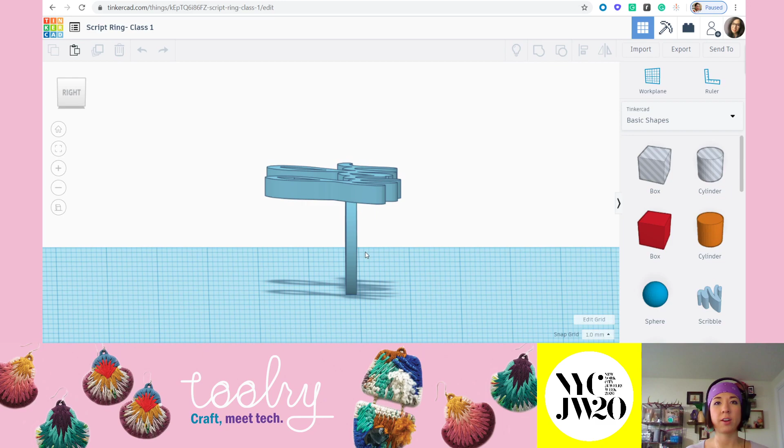Jumping right in, to give you an overview, this is the ring itself. For this class, you're going to need to know your ring size. Both finger holes will be the same ring size unless you choose to go otherwise, which is fine. You will also need to decide what this width is in this direction and this width in this direction. In this case, it's 2 millimeters for me, and it's the same in both directions, so it's a square cross section.

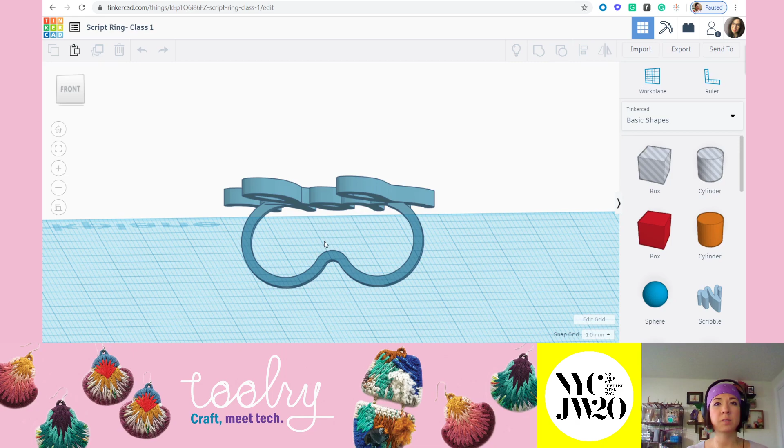The way this class is going to go is we are going to first model these two ring shanks, then model the connection point, then trim away all the excess metal of the shanks, and then the last thing will be the word or the script itself. Jumping right in, you'll want to create a new Tinkercad window, create new design.

The first step is to get the ring shanks together. To do that, we're going to take a cylinder from the Basic Shapes menu and drop it roughly in the center of the work plane. We're going to reposition this cylinder by rotating it 90 degrees and then resizing it to our ring size.

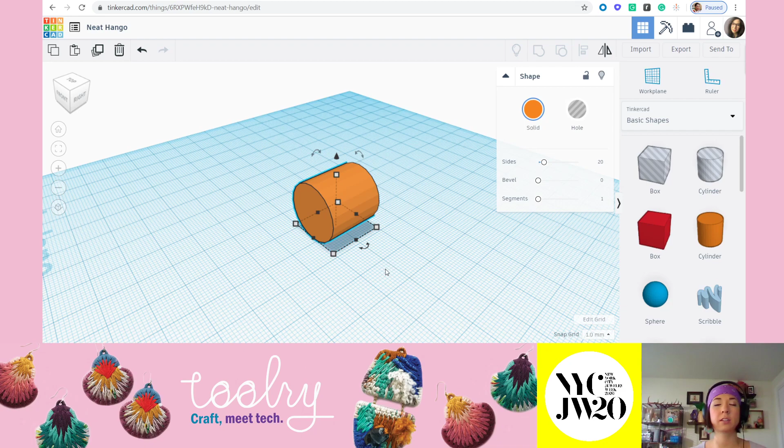In my case, I'm a ring size 6, which is 16.5 millimeters. If you need to find your ring size, you can look at the full class description in the comments of the video itself. I have all sizes from 5 to 13 listed, so feel free to pull that there or follow along if you're a size 6.

So we're going to resize this to be the inner diameter or the ring size. I'm changing 20 to 16.5, which again is a size 6, and 16.5. So you now have a perfect cylinder in your ring size.

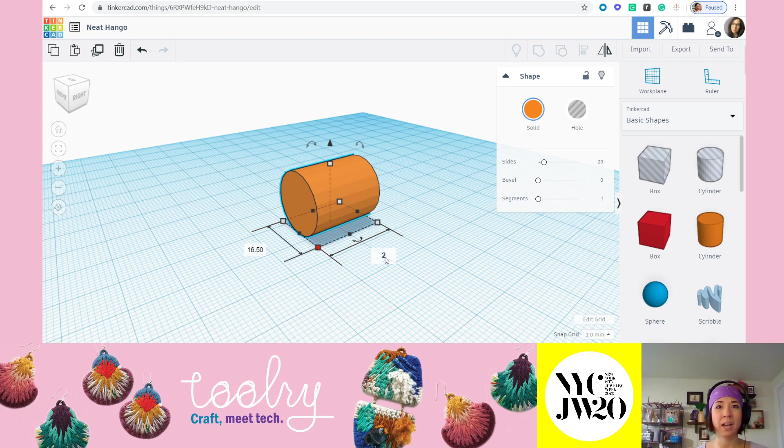We are also going to change the side measurement to, in my case, 2 millimeters because I want to have a 2 millimeter thick band. We also want to increase the number of sides to remove these faceted faces. Clicking on the cylinder, increase the number of sides to 64, and now we have a nice smooth cylinder.

At this point, we're going to duplicate and hide. So duplicate, hide. Now I have one cylinder left, and I can see that I'm hidden up here.

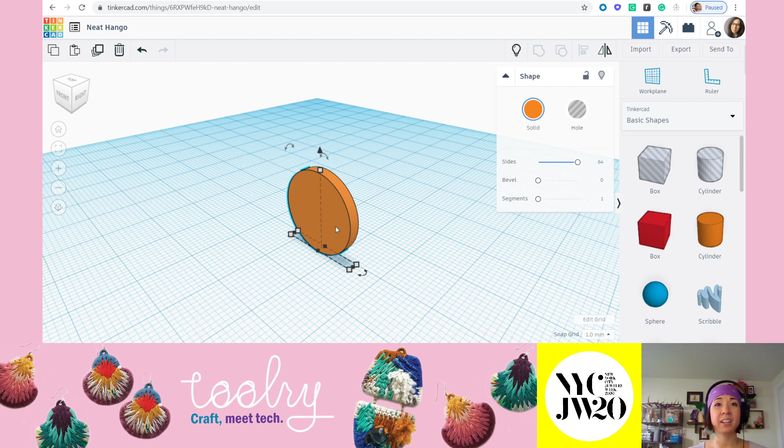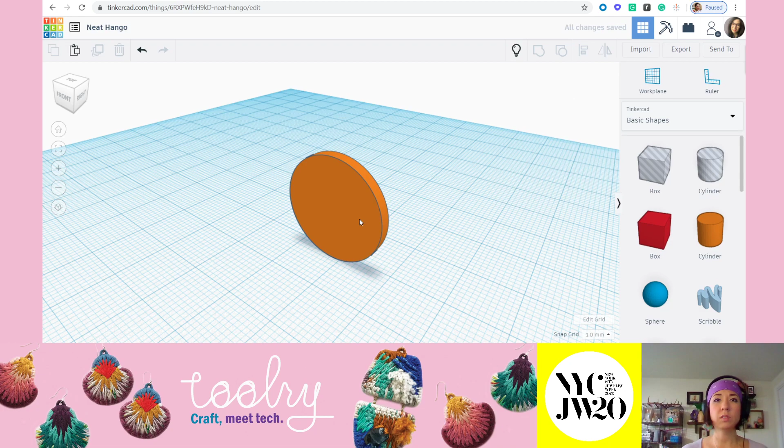I'm now going to resize the cylinder, basically creating the wall thickness of my ring shank. I had done 2 millimeters in this direction, and I also want to have a 2 millimeter thickness all around. That means I'm adding 2 millimeters to either side of my diameter, or 4 total millimeters. So 16.5 becomes 20.5 -- I've added 4 millimeters in my case. You might be different if you have a different thickness. So now just to double check that: 20.5, 20.5, and 2.

You're going to want to just remember those measurements that you had set. For me, I said 2 millimeters this direction, 2 millimeters this direction. We will need this in a little bit, so make a note of that somewhere. Go ahead and show or unhide your previous cylinder. Mine's overlapped, so I'm just going to drag it out of the way. And you're going to turn your smaller cylinder, your original one, into a hole.

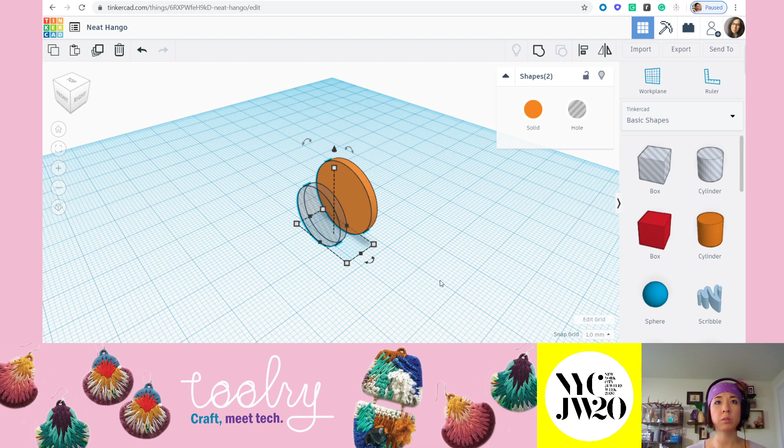We are now going to use the drag a bounding box to select both objects, and we're going to use the align tool to align the center points. For aligning, you want to select the center point nodes of all different orientations. When I do that, I can see that I've got perfectly lined up center points and my hole extends all the way through to the backside of the solid.

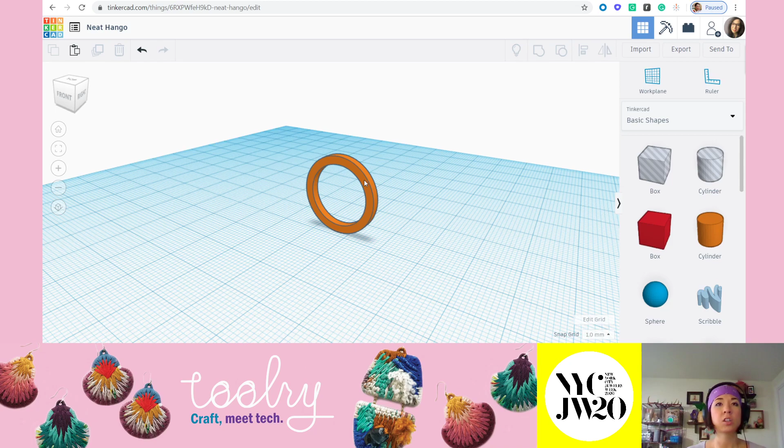At this point, I'm just going to highlight these to select them together, group them to cut away, and now I have my basic ring shank. At this point, you want to go ahead and toggle to the front view, so that we can get a nice perspective of these. Then go ahead and just toggle this to flat view rather than perspective view.

Now you're going to duplicate this shank, and you're going to use the arrows to slide your new copy over so that you're positioning the two ring shanks side by side.

So for the position itself, you want to get these in place. Depending on how close they are, your little connection arch will be lower, or if you have them further apart, you'll end up putting that arch a little bit higher, or at least those ring holes get spaced a little wider. If you've got big gaps between your fingers, you might go a little wider. If your fingers seem very tightly spaced together, you might go a little bit closer. I'll go a little closer, but you want a little bit of a gap right there in the center.

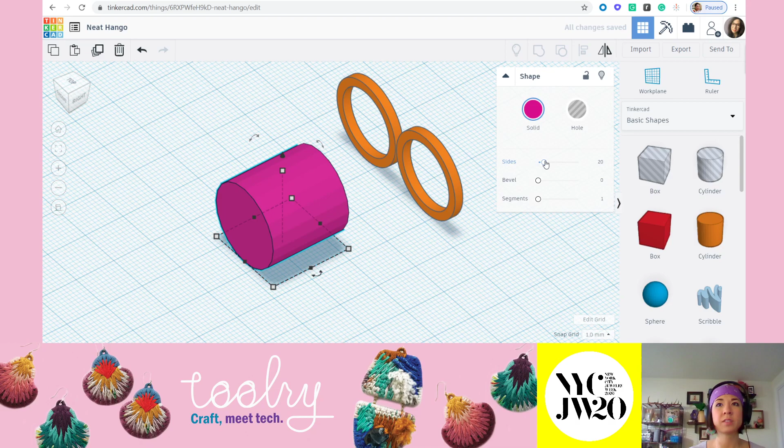At this point, we're going to lock these two objects temporarily, and now we're going to work on that little arch, that connection point. To do that, we want to grab a new cylinder, drop it roughly in front of our previous cylinders, and change the color. I'll refer to this as the pink cylinder, so you could change it to pink too. Just a little bit in the front, and then again we're going to rotate this cylinder 90 degrees, and increase the number of sides to make this a perfectly smooth cylinder.

At this point, I mentioned you're going to want to remember that measurement here and here, so just keep that in mind for the time being. We're going to go back to that front view and change your snap grid increments from the default of 1 millimeter to 0.25 millimeters, so you can get a little bit more precision on this next part.

You're going to select the pink cylinder and resize that. I'm holding shift so that when you scale it down, it remains cylindrical and doesn't turn into an oval. You want to scale this down, and I can't really tell you what size this should be — it depends on the ring size itself and also the spacing.

But here's what you're going for: using the arrows, get this in a good position where ideally you want the outer edge of the pink cylinder to match up with the inner edge of the orange ring shanks. You want as little gap as possible and as little overlap as possible. Let me show you what we're going for — that right there is the perfect overlap. You can see this is not in line, that's fine. Really what we're concerned about right now is continuing this curve into this curve and then back down.

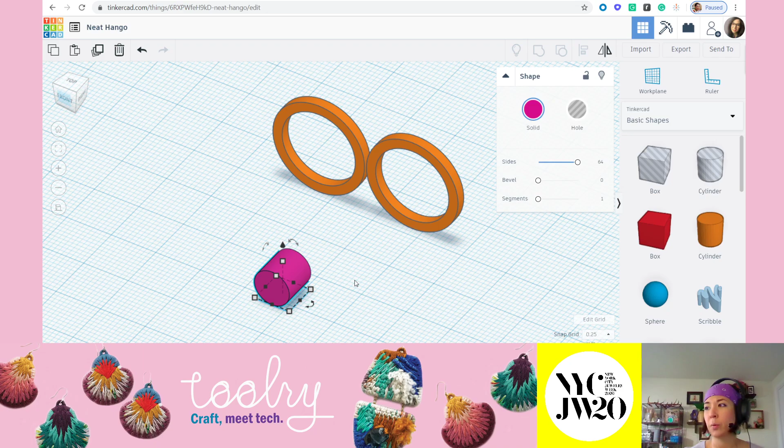So once you have that, we're going to continue to move on. Now you can see that my little pink cylinder is not really in a line, but we have it in the right position. So we're now going to unlock, select those, unlock, and just hide these for the moment. We have a little more work to do on this cylinder, so go ahead and duplicate and hide one of them.

Now we're going to make the inner hole for this cylinder so we can cut it away. First, change that to be a hole — this is your duplicate cylinder, you've got one hidden. So this is now a hole feature, and I said to remember the wall thickness or the width of your ring band, so this is where you need to recall that information. The way I had increased my first cylinder by 2 millimeters on either side, going from 16.5 to 20.5 in diameter, I'm now going to decrease by 4 millimeters instead of increasing.

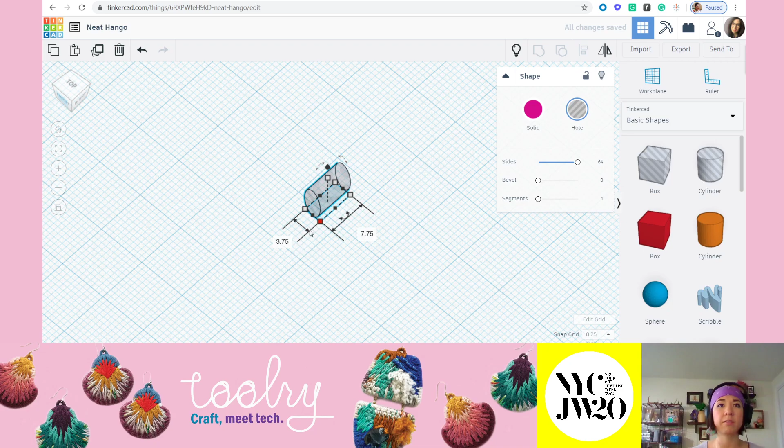In this case, I'm at 7.75 — you'll probably be at something different. I'm now going to drop down to 3.75 and 3.75 so that this cylinder is now 4 millimeters smaller than my original small pink cylinder.

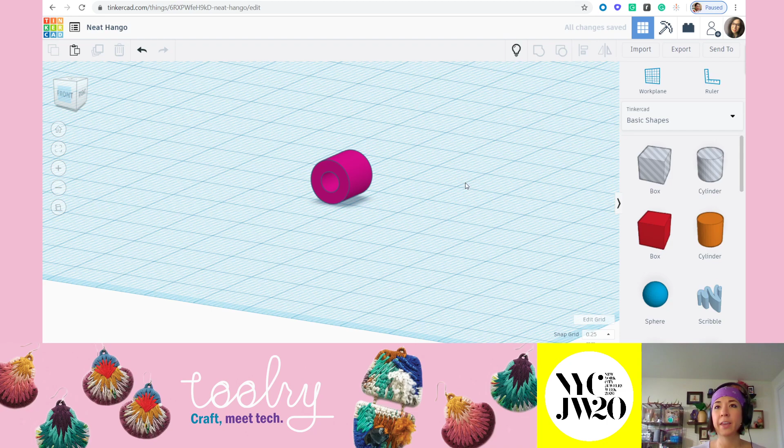Let's go ahead and show all objects again, but I'm just going to hide you for now — I just want to focus on these two. Now you can see I have the large cylinder and the small one. I'm going to align these two by highlighting both, clicking align, and again looking for that center point alignment. What you're looking for is a perfectly centered inner hole in the solid cylinder. Once you're happy with that, bounding box select, and group those.

And the last thing you're going to do here is resize this width right here. In my case, it's 2 millimeters because I have a 2 by 2 ring shank.

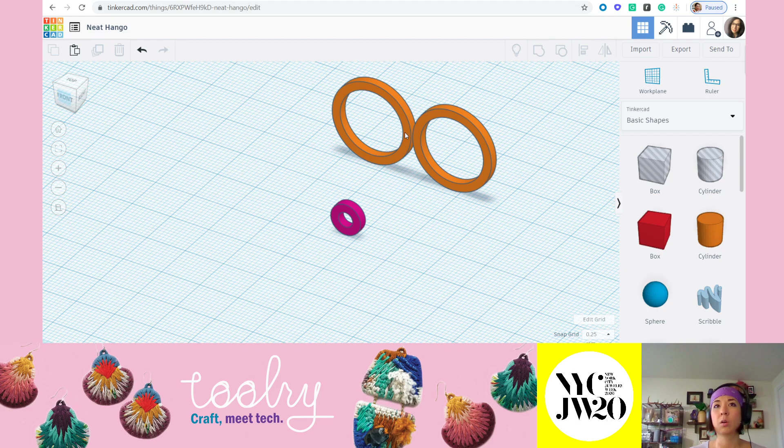Okay, so now we're going to show the cylinders again, and let's do some alignment here. Actually, don't lock those, you want to group them. We want these to act as one central item so that you have a center point we can use to align this guy. Once you've grouped these, you could lock them as well, but really we're looking for the group.

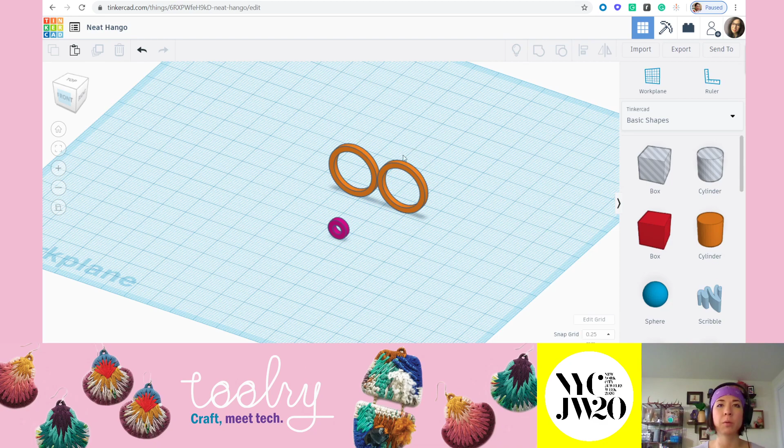We are going to bounding box select all of them, use the align tool once again, and look for alignment on this black node only, because your center point should already be aligned. If this is not a black node, click that and change it. These ones should also be grayed out. Then just to visually verify, we can check the front. That looks really good.

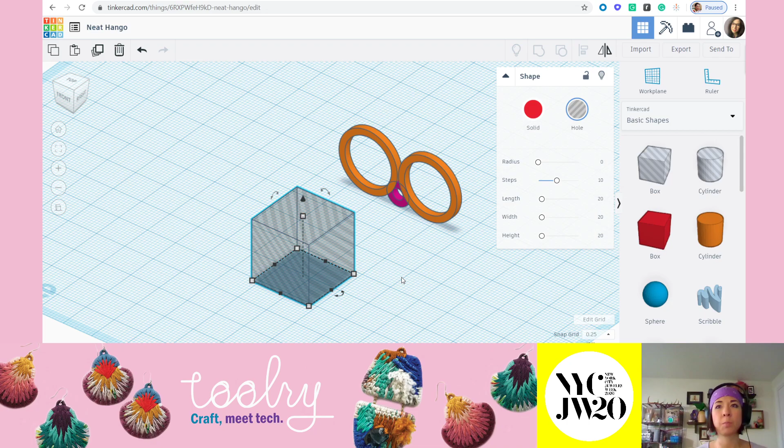All right, moving on, let's lock these for the moment. Now you're going to grab a box, and we're going to do a box hole. We're going to do this to cut away some material in our original ring shanks. Again, navigate to the front view, and you're now going to resize and reposition your box. Let me show you and then I'll explain.

I'm going to move this up to make sure I'm clearing the tops of my ring shanks. I am going to start to resize this. I actually have to go from the top down to resize it. Move it up into position, get a little taller, maybe a little wider here, use the arrows, a little wider further. Okay, so this is roughly the position I'm looking for, and let me explain why.

Actually, now that I get closer, it needs to be a little bit higher. I am essentially trying to cut away all of this internal mid part, the central part of my ring shanks. Everything, all of the orange that is now striped with the box hole, these stripes right here, all of that's going to get cut away. I'm looking for that because what I essentially want to be left with is a gap from this 12 o'clock point and the 12 o'clock point. All this should be cut so my ring band is shaped in an arc like this.

So you want to really try to aim the bottom of the box hole to be right at that sort of intersect point where your pink cylinder overlaps and is tangent right here with your orange cylinder. So for me, that's the placement I'm looking for. Now I just need to use my align tool on everything. I'm going to navigate to top view, use my align tool, look for that top back alignment, and visually verify that my box hole cuts through everything, which it does.

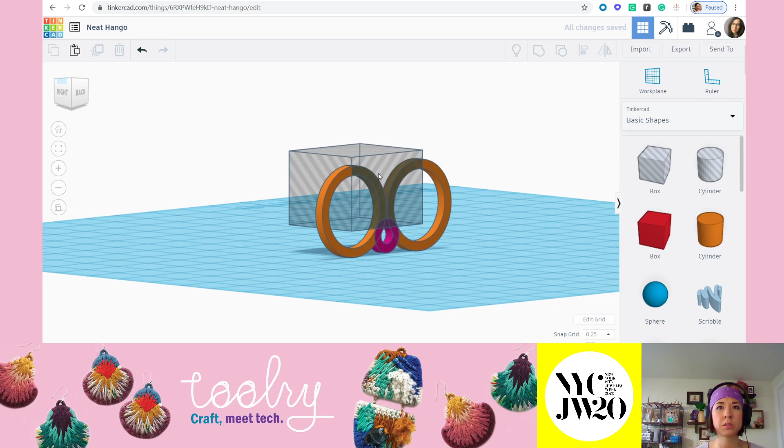And I'm just going to unlock the ring shanks. My ring shanks are still grouped together. You want to have both selected, or if they're grouped, they'll both be selected now. Select your box hole and group to cut away. Okay, so now you can see we're getting pretty close to the end of this ring shank. So now you want to go ahead and lock those, lock the ring shank again. And now we're going to cut away this area down here.

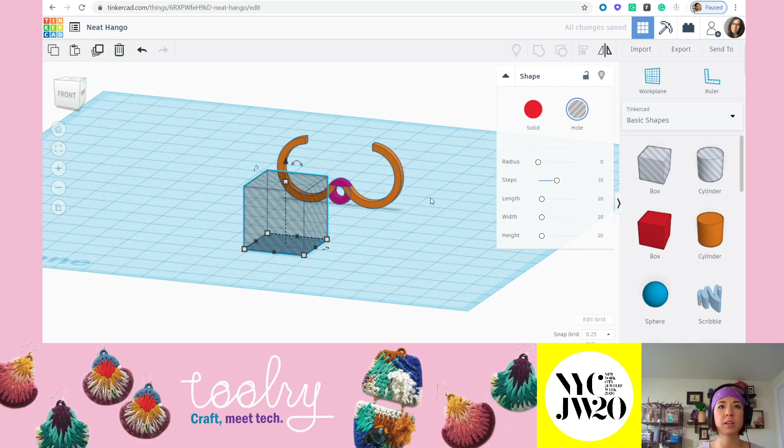So grab that box hole again, place it in front, go to the front view, and then we're going to do sort of the opposite. We're going to now resize this, but now we're focusing on cutting away the pink. So I'm now concerned with getting my top edge in line with that intersection point between the pink cylinder and the orange cylinder. I'm trying to cut all of this away.

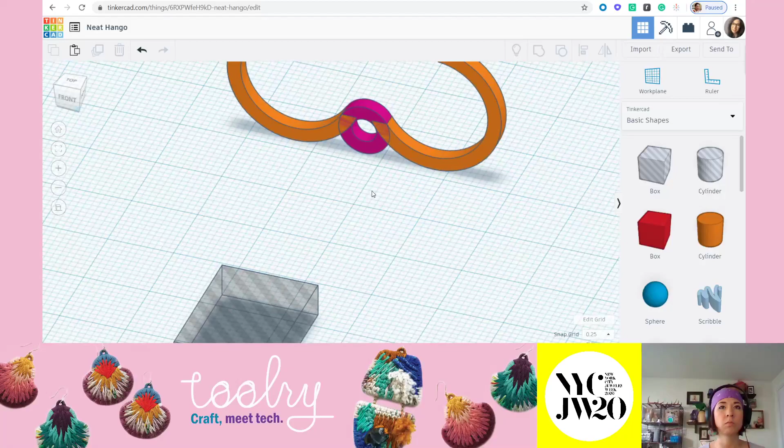So I'm actually just going to increase the height and move this down just to make sure I'm really ensuring I cut the pink away. Okay, so once you're happy there, you're again going to navigate to the top view, highlight everything, align to, again, that top back, and verify visually that your hole is going to cut through everything. It is.

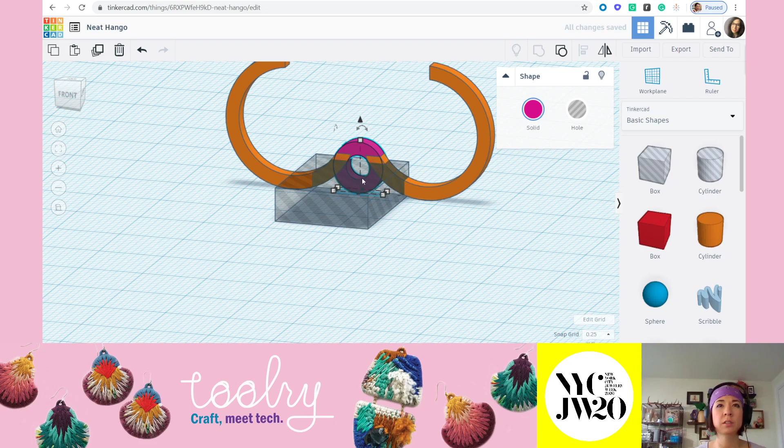Unlock the cylinder, the pink cylinder. Select the pink cylinder, select the box hole, and group it together.

At this point, just do a quick look over. Are you happy with everything? It looks good. Let's unlock everything here. Bounding box, select all of it, group it together, and now we have one seamless ring.

Okay, your ring shank is done. Let's lock it for the time being. So at this point, we are going to move on to the final step, which is adding your script. The script is the scribble tool, so grab your scribble tool and drop it anywhere in the front.

You can see that I have a preview up here, and this is where my scribble is going to land. At this point, you have a little blue circle that's frozen to your cursor. You're going to use that like a paintbrush or a pencil tip to write.

Whatever your word is, I'm doing my name. You can do whatever you want. And don't worry right now if it's not perfect. Maybe make the I dot a little bit bigger.

I'm going to show you how to edit it in a second. But first, we want to get in position. So we now have an object that you just created yourself. Go to the top view, and again, let's make sure that top view is flattened.

Now just drag your script in place. This is where you've got to make some decisions about how you want this to look. How big do you want it to be? I think I'm going to go a little smaller, so mine is not really overhanging too much.

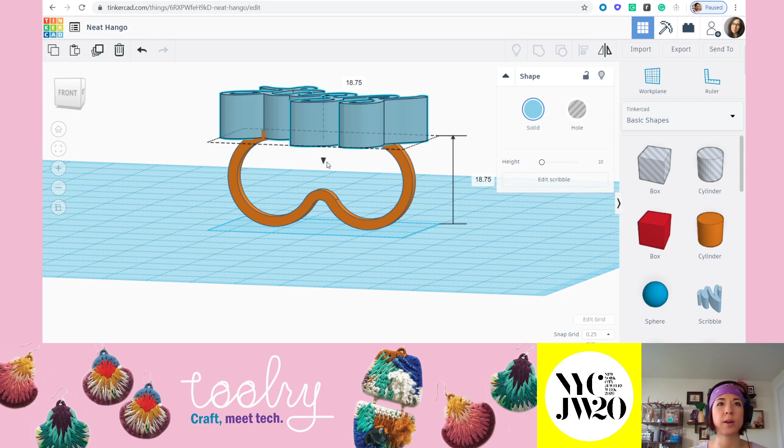At this point, I just need to resize the thickness of it and move it in place. First, I'm going to move this into place by dragging it up in the height. What I want you to be really, really careful about...

Toggle to the front view. Right now, I want to make sure that my script is not dropping below this point right here, because this is the ring hole based on your finger size. So if this is too low, you're obviously going to reduce the hole in your ring.

If it's way too high, you're going to have extra wiggle room. So you're aiming for sitting right there, kind of right intersecting or right above it. That's the perfect spot for it. And now you're going to resize this.

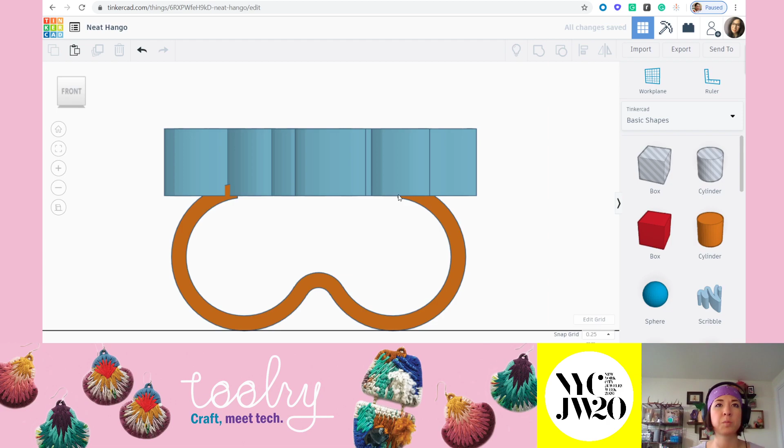In my case, I recommend 4.5 is as thick as I like to go. It becomes very chunky after that, and I wouldn't go less than about 2 millimeters. So I think I'm going to go about 3 millimeters here. That looks good for me.

So basically, this is really where we're just fine tuning now. The last few steps I want to do: if you feel like you don't love some details of your script, go ahead and edit it. When you select it, hit edit scribble, and you still have that paintbrush cursor, so you can go in and add more if you'd like. If you want some areas to be a little thicker, you can do that.

If you want to erase some areas, I'm like, oh gosh, this is a really large dot on my I, I might erase a little bit. You can do that. Ooh, that's kind of funny. So just make any kind of edits you want. Maybe my tail is a little bit too big.

And you say done. So now you've updated your sketch. You can see my I has changed, my L tail is thicker, and my little Z tail is a little bit smaller. So go ahead and edit your text to make it how you want it before you finalize everything about your ring.

At this point, a few things: if your letters are not connected like mine is, you do need to connect those. Here's a good example, the I, this dot is floating. It's not going to print that way. You won't be able to fabricate it. It's just floating in air.

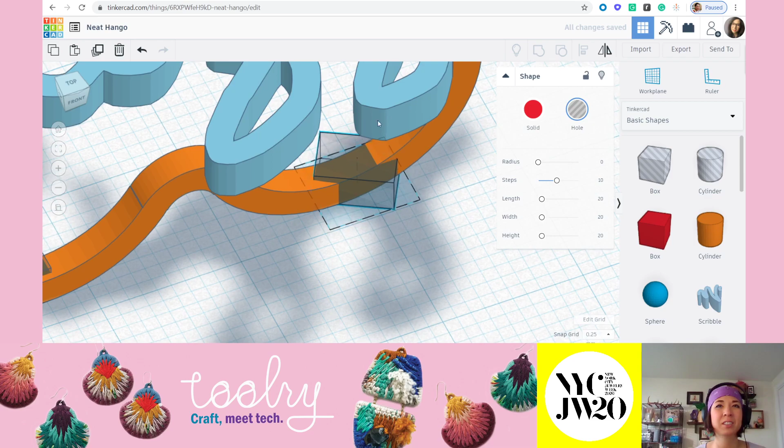So I'm going to rotate this a little bit. If I can grab that arrow, go back to my top view. Did I rotate enough? A little more. Okay, so pretty good there.

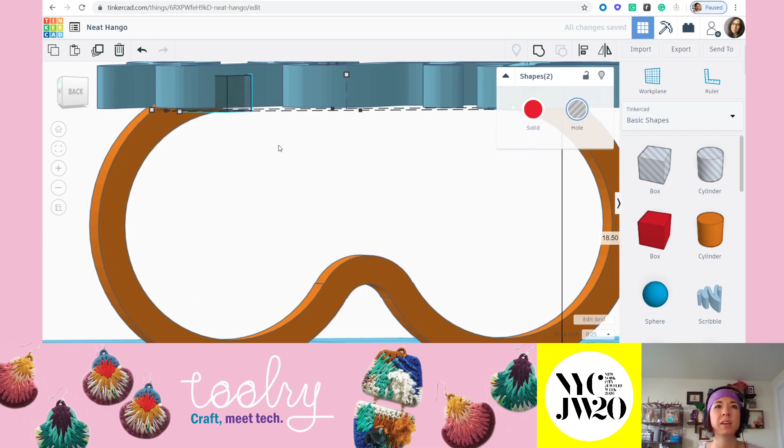Just need to raise both of these box holes up so that they actually intersect what I want to cut. In this case I may need to make them taller. So let's work at one at a time. For this one, I'm verifying that I actually need to lower it down a little bit so it does in fact cut everything away.

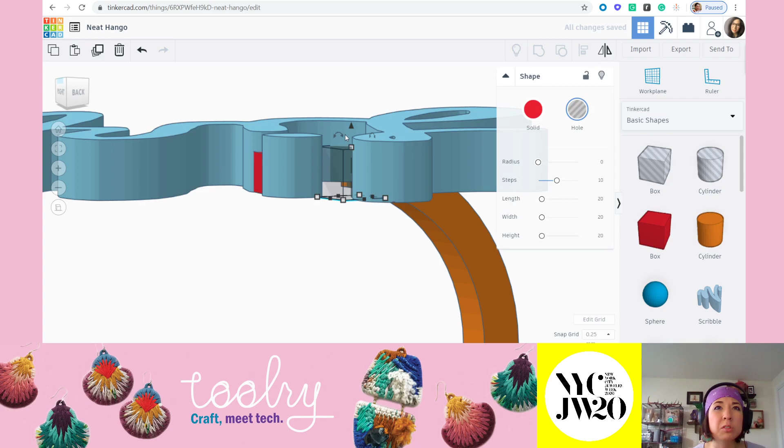Otherwise I'd have this awkward little shelf right there. So I'm going to move this down a little bit. Actually, I'm just going to make this plenty tall, to make sure that I'm clearly cutting through everything.

I also need to widen it or move it over because there's a little sliver left over. So I just want to make sure I'm trimming off just this area in here, which is going to be good on that side. And then moving this side.

You might wonder why I haven't hidden my script. It's because I actually want to see what is intersecting and what's not when the script is in place. So again, make this taller so that you're certain it is intersecting the whole piece.

So now I'm like, oof, that's maybe a little bit too far to cut. So I might actually just drag this out and decide, do I like that cut? I think I do, but I think I need to make this box wider.

And you can see that I've now also skewed it in this direction, so I'm missing that little corner. So I'm going to pull that this way. Okay, yeah, that's a good cut for me.

I'm happy with that. Okay, so now I'm going to unlock everything, or just really unlock that band for the moment. And I'm going to select my box hole, select my other box hole, select my band, and group all of it to cut away.

So at this point, I have a finished ring. I'm really happy with this.